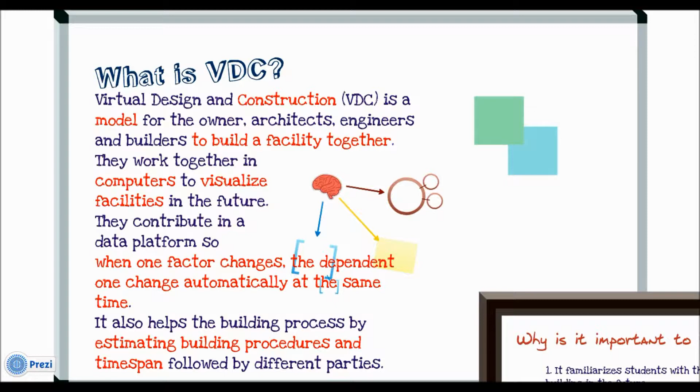Different parties also contribute in a data platform by inputting different data about the construction works. For example, the time required by each construction work, the cost of each factor of construction, different design parameters, etc., so that the building process can be carried out smoothly and efficiently.

One may ask, why is VDC education important to a university? First, it familiarizes students who are going to take part in the real estate and construction industry with the state-of-the-art construction model, which is very likely to be widely used in the future.

The VDC model has been attracting more and more attention from practitioners and scholars worldwide. And with the growing trend of using computer and cloud platforms in the industry, it is better to equip students with the knowledge rather than leaving them barehanded.

Another reason why university needs VDC education is that the model gets students to think holistically. By inputting and presenting different parameters in a computer platform, students can understand what is involved in a construction project and what they have omitted in the planning procedure.

Also, they can learn how to identify and rectify clashes in design and procedural aspects, so that in the future when they are engaging in construction projects, they can have better planning and design.

Of course, the VDC model attracts more and more attention not without reason. The first advantage of VDC at work is that it speeds up the construction process for different parties.

One significant feature of VDC is the use of internet platform and cloud system. This feature allows different parties to take part in the project via internet rather than in traditional face-to-face manner. Also, information can be retrieved easily anywhere at any time by anyone. This advantage is especially significant when the project team consists of members from different places in the world.

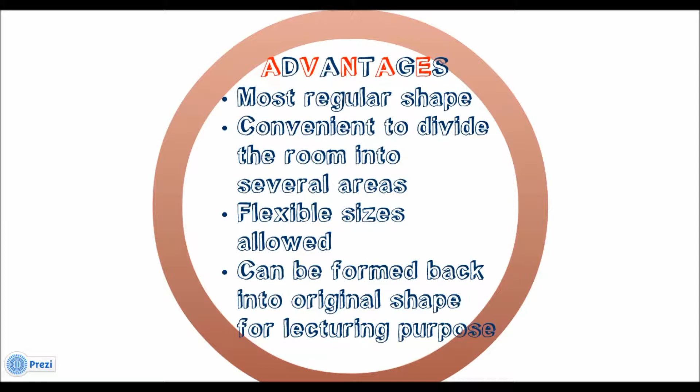KB526 can also be formed back into its original shape for lecturing purposes. The only disadvantage is that we have to change the framework of KB526.

For instance, the position of doors, alignment of walls and floors, because we have to demolish the steps to accommodate electrical wirings. The false ceiling has to be added as well. All these alterations aim at fitting the usage of the iRoom and other corresponding building surfaces.

Refer to the basic designs and infrastructure provided. The room can be divided into 3 compartments. It will be equipped with an iTable, 2 fixed smartboards, 2 movable smartboards. There are sufficient tables and chairs to cater for 70 students, or just 100 chairs for a big lecture.

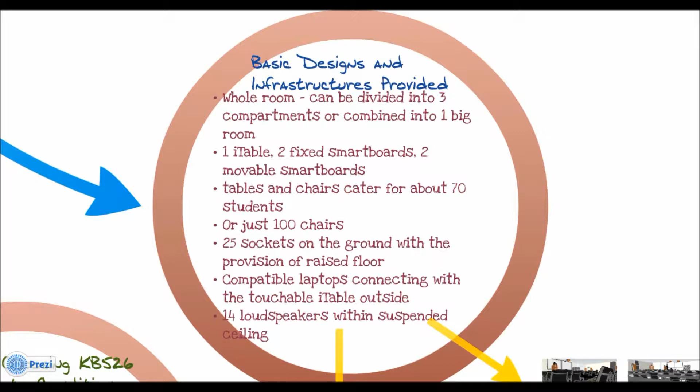25 sockets are hidden on the floor with the provision of raised floor. Both touchable iTable and smartboard can be connected to compatible laptops. There are a total of 14 loudspeakers on the false ceiling.

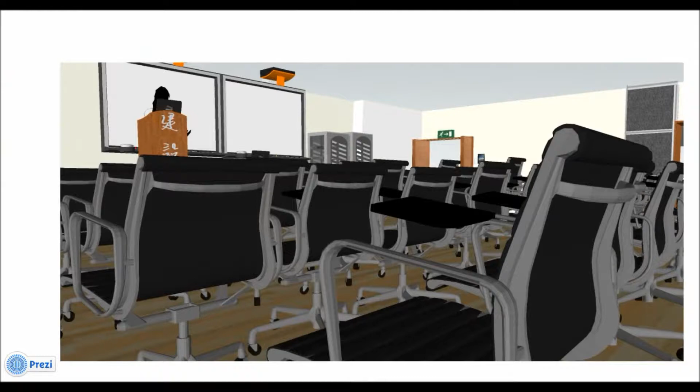Here shows you some photos of the room, the chairs, the tables. You can see that the room is divided into 2 compartments by using partition walls. It can be divided into 3 compartments as well.

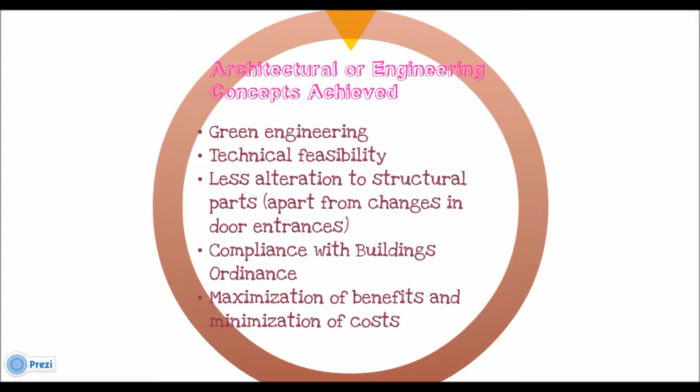In our room project, we try to achieve architectural and engineering concepts. Green engineering concept is achieved as the room is in fact energy saving and sustainable. Technical feasibility is considered. Apart from the change of the position of doors, alteration to structural parts is avoided. In our project, building ordinance is complied with, benefit is maximized, and cost is minimized.

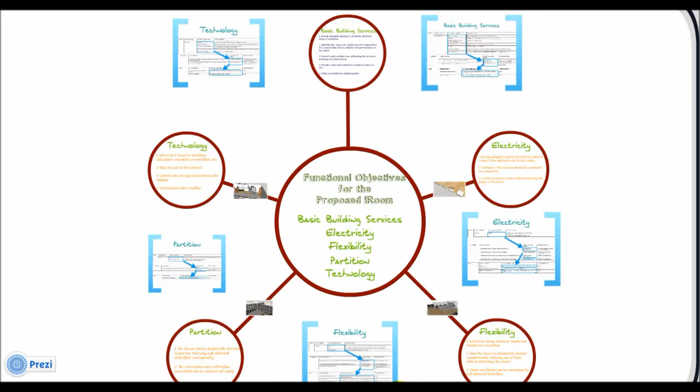Now, let me talk about the functional objectives of the room and how these objectives can be achieved. There are 5 functional objectives, namely building services, electricity, flexibility, partition, and technology. A product organization process model, or in short POP model, is used to explain how the goals can be achieved.

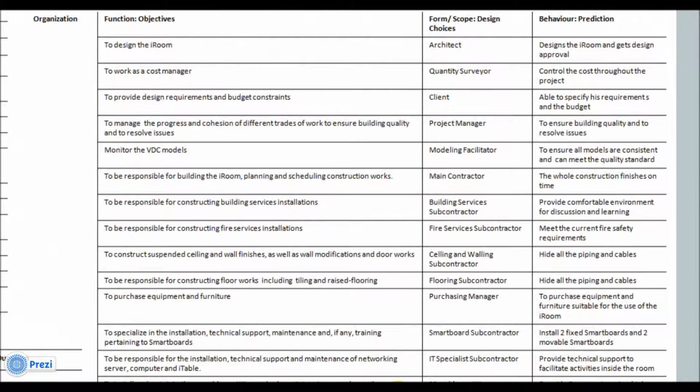Here is the product part, the organization part, the process part.

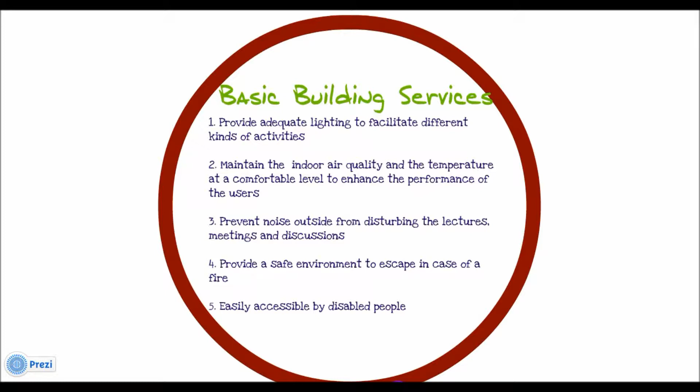In terms of basic building services, adequate lighting will be provided to facilitate different kinds of activities. Indoor air quality and temperature will be maintained at a comfortable level to enhance the performance of the users. Noise outside the room should be prevented from disturbing the lectures, meetings, and discussions. A safe environment is provided for escape in case of a fire, and disabled people can access the room without any obstructions.

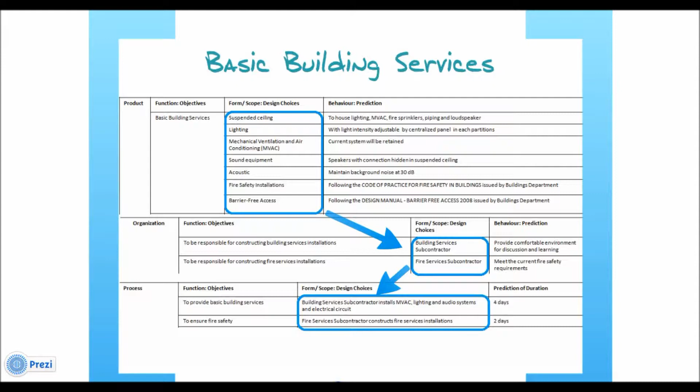Referring to the POP model, a building services subcontractor will be employed to install suspended ceiling, lighting system, MVAC system, sound equipment, acoustic treatment, and barrier-free access facilities, while a fire services subcontractor will be responsible for the fire services installation.

In terms of electricity, adequate electric sockets will be provided for users to connect their laptops to electricity supply. Positions of the sockets should be convenient for connection but hidden so as not to affect the design of the room. Therefore, sockets are hidden in the raised floor.

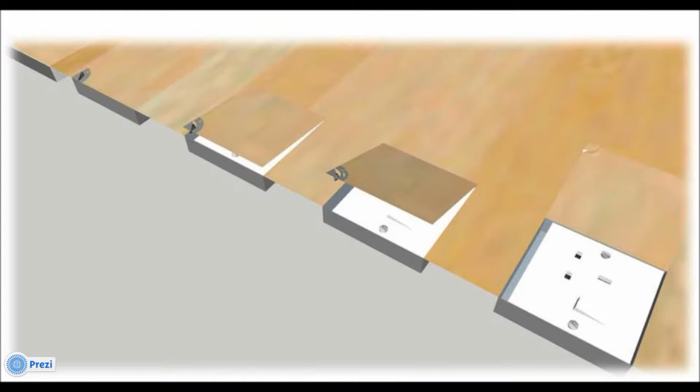Referring to the POP model, a building services subcontractor and a flooring subcontractor are responsible for installing the sockets cooperatively.

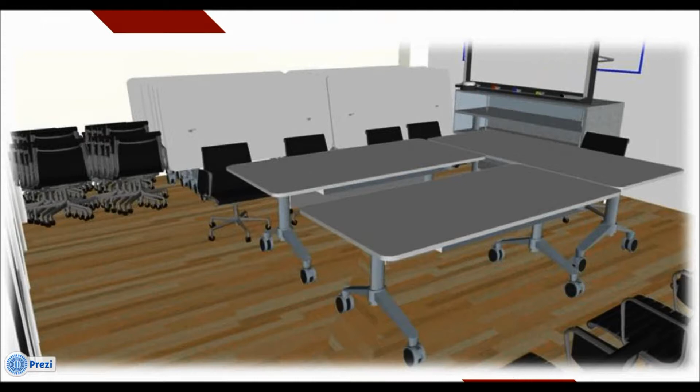In terms of flexibility, electrical wiring should be hidden and flexible for relocation, entering one of the compartments without causing disturbance to users of other compartments. Also, chairs and tables should be movable to facilitate different activities.

Referring to the POP model, a ceiling and walling subcontractor has to modify the door openings. A floor subcontractor has to build the raised floor for accommodating the wirings, and the purchasing manager is responsible for buying movable chairs and tables.

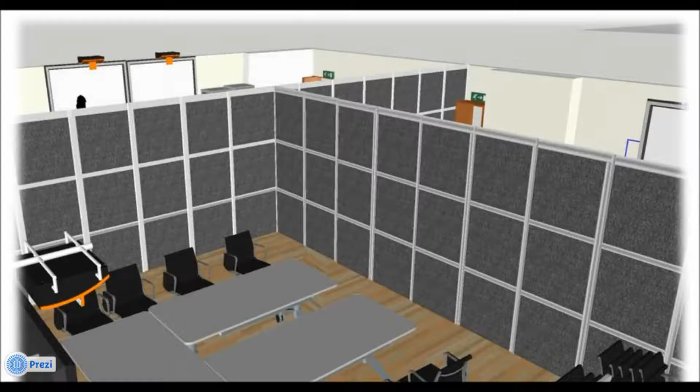In terms of partition, the room should be able to be divided into several compartments for carrying out different activities concurrently, while the conversion and restoration process have to be easily carried out. Therefore, movable internal partitions will be used.

Referring to the POP model, a movable partition subcontractor will be employed to construct movable internal partitions so that the room can be divided into 3 multi-purpose compartments.

In terms of technology, high-tech tools and internet access will be provided. A server capable of central data storage, internal data sharing, and a centralized control system will be installed.

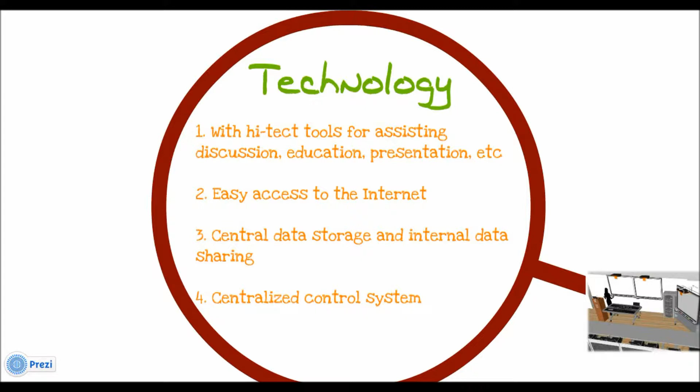Here you can see the iTable and smartboards. Referring to the POP model, a smartboard specialist will be employed to install the smartboards, and an IT specialist subcontractor will be responsible for all other high-tech tools and systems.

Since the 5 functional objectives have already been illustrated using the POP model and parts of the 3D BIM model, I will talk more on how those 5 functional objectives can be achieved using the Gantt chart and organization chart below.

First, I will start with the functional objective of efficient basic building services. What we have to focus on is how this objective can be achieved through careful planning. Planning in terms of time and person in charge is significant to the success of a construction.

For example, we can see that installation of different types of building services may be done by different specialists. However, one party's process of work and final finishing product may affect the other party's work or efficiency, etc. In this case, for instance, the installation of fire services may have some correlations with the installations of MVAC system and lighting system.

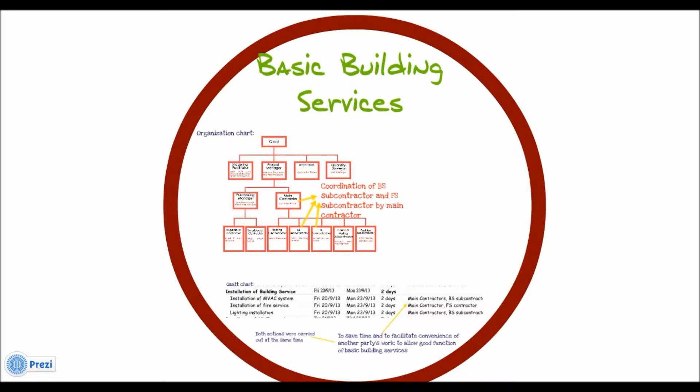In order to facilitate future usage during the occupational period and potential maintenance of the electrical wiring system within the raised floor, we have the following arrangements. The work of the flooring subcontractor will start as soon as the building services subcontractor has fixed all the electrical wires, as indicated in the Gantt chart.

This is to ensure that there will be enough space for future fixing or maintenance. Also, this is to avoid too much dust or various particles from accumulating on the electrical wires, which will in turn affect the performance of the electrical wiring system.

Once again, as shown in the organization chart, both the building services subcontractor and the flooring subcontractor are under the supervision of the main contractor for higher efficiency of work.

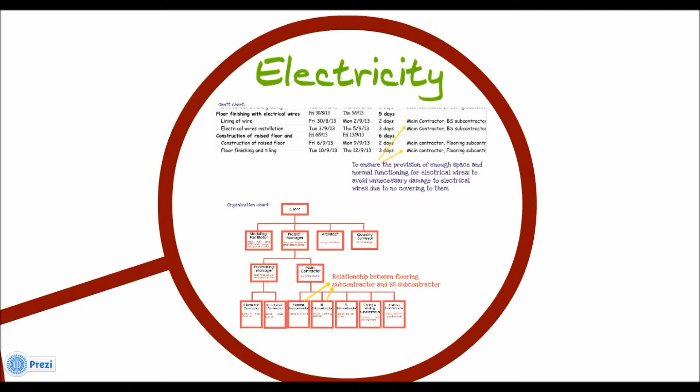Next, talking about the functional objective of maintaining flexibility and providing partitions. Different measures have been planned, some may have already been mentioned in the previous part using the POP model and some parts of the 3D BIM model. These include the installation of tracks for partitions and also the alteration to the walls to make new door entrances.

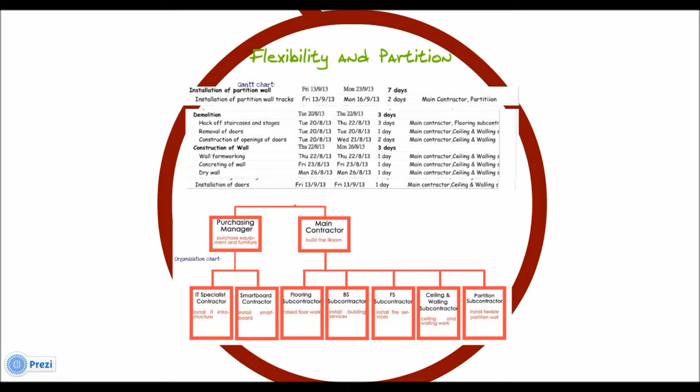However, from the Gantt chart, it is noted that some of these jobs cannot be done in parallel with other jobs due to structural safety issues, like in the case of partition tracks and door entrances.

Lastly, for the functional objective of technology, we have allowed the installation of internet and cloud systems to be done during the same period of time. This is to help facilitate each other's work.

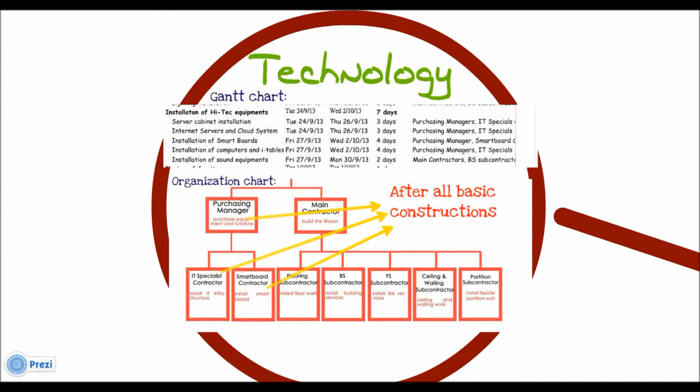The installation of computers and the iTable will also be done in parallel to ensure the coordination of all systems mentioned in the Gantt chart.

Now I'm going to talk about the 5 business purposes of the models. First, VDC strategy can enable companies to achieve significant breakthrough objectives. Some organizations now find significant competitive advantage from their facilities or their timelines of developing new facilities. The project can be completed in drastically less time while preserving or improving quality, schedule, and cost performance.

Second, different stakeholders have different responsibilities. VDC improves the coordination and exchange of information between project stakeholders. This results in effective and quick solutions to bottlenecks that may occur during a project and that could prove to be costly during the construction phase.

Third, stakeholders can collaborate by sharing visualizations. The model strongly emphasizes the use of models that can be described to and evaluated by multiple stakeholders. It ensures the integration, follow-up, and management of all 3D models within a central model.

The 4th dimension links construction planning with the element of time. 4D models allow our customers to visualize and optimize project phasing and construction sequencing.

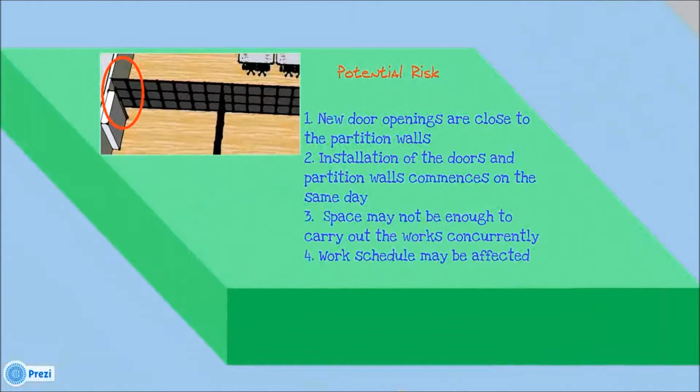There are some potential risks in the project. For example, since new door openings are close to partition walls, and the installation of doors and partition walls commences on the same day, space may not be enough to carry out the works concurrently and the work schedule may be affected.

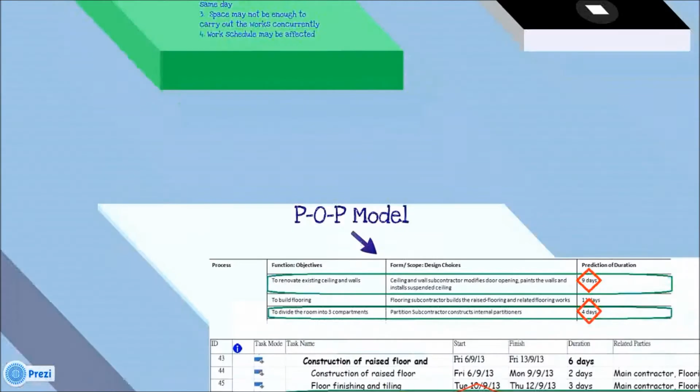From the process chart of the POP model and the Gantt chart, we find the information of relevant works. For example, from the POP model, renovation of the existing ceiling and wall takes 9 days, and construction of the internal partition takes 4 days. From the Gantt chart, we can see that the installation of doors and partition wall tracks start on the same day.

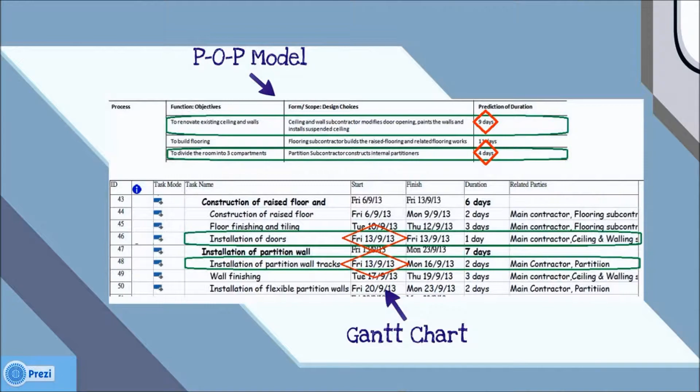Both contractors and client have to take some risk on this task. The wall and ceiling subcontractor and the partition wall subcontractor may fail to finish their work on time, which affects other trades. Then they have to pay damages to the client. On the other hand, the client has the risk that the overall schedule may be affected and the construction may fail to complete on time. Then iRoom services cannot be provided at the beginning of the semester.

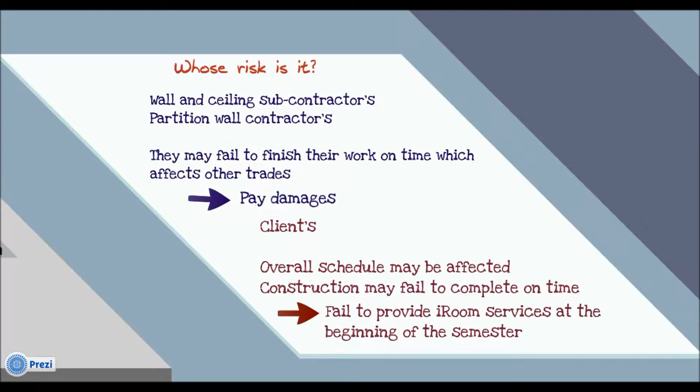From the organization chart, the main contractor is on top of the related subcontractors. Therefore, the main contractor has to provide coordination and instruction to subcontractors so as to avoid them carrying out the work at the same area.

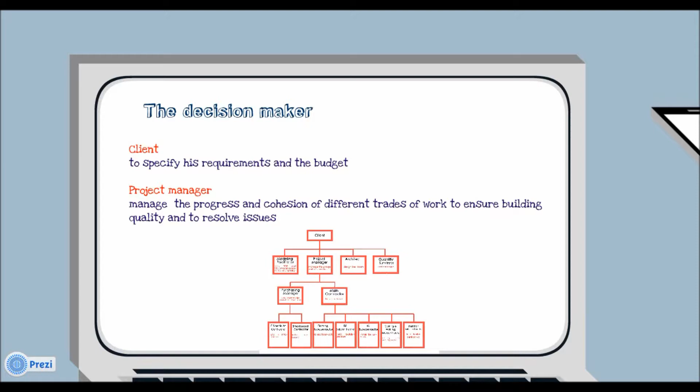The decision makers of the project include the client and the project manager. The client is responsible to specify his requirements and the budget. The project manager is responsible to manage the progress and cohesion of different trades of work to ensure building quality and to resolve issues. From the organization chart, the two parties are on top of the contractual arrangement.

So why do we have to do the modeling and analysis to present to the client? Through these models, our clients can know in detail the possible and proposed quality that can be achieved in terms of technology, durability, and convenience. Also, our clients would like to know the whole life cost, including the future predicted repairing cost. Schedule and risk are important too, since this will affect the smoothness of the construction process.

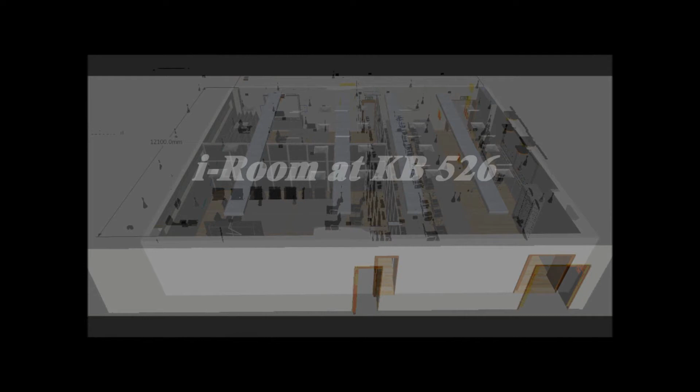After we have discussed the concept model behind this project, let's see our 3D building information model and understand how we realize or measure the function. In this model, false ceiling and building surface on the roof is hidden for the ease of observation.

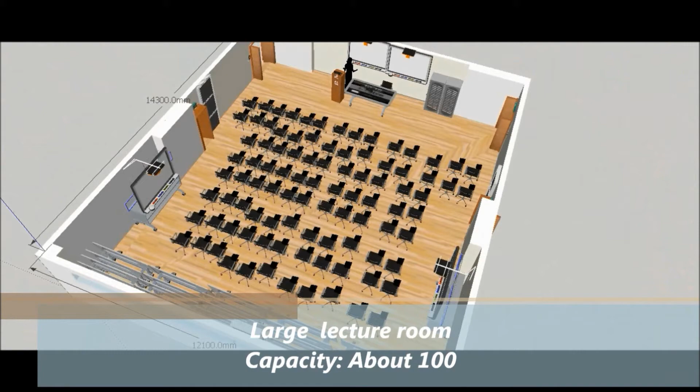In this layout, all the tables are folded, put at the back of the iRoom. It can cater for about 100 audience. This layout is suitable for common core classes or guest open seminar.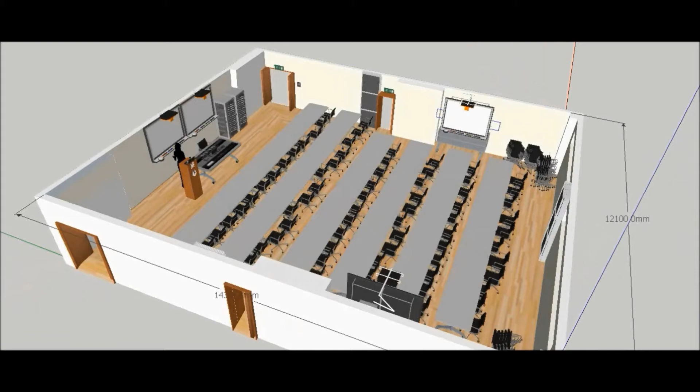In the second layout, it is a lecture room with table and chair. It can facilitate students' learning by providing more table space. It is crucial as our department needs to teach VDC in future. Students need to use their computer, mouse and notes at the same time to learn.

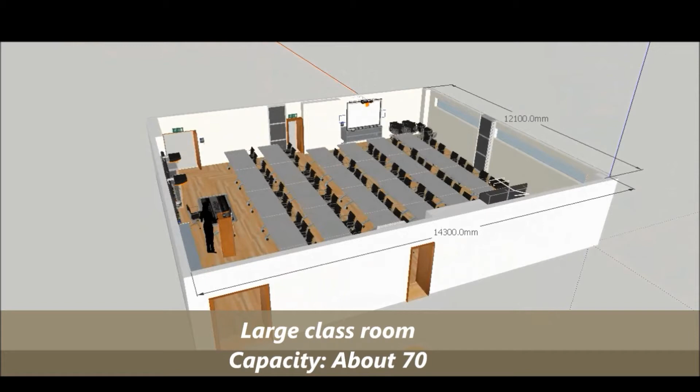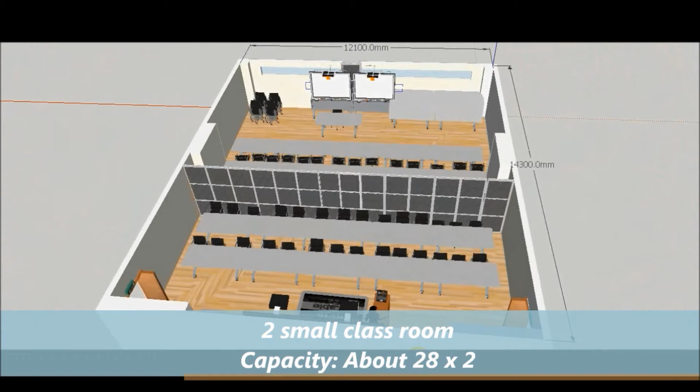Our iRoom can be divided into two smaller classrooms by movable wall panel. Each side can cater 28 students. It can be used for tutorial classes. This layout can facilitate two classes at the same time.

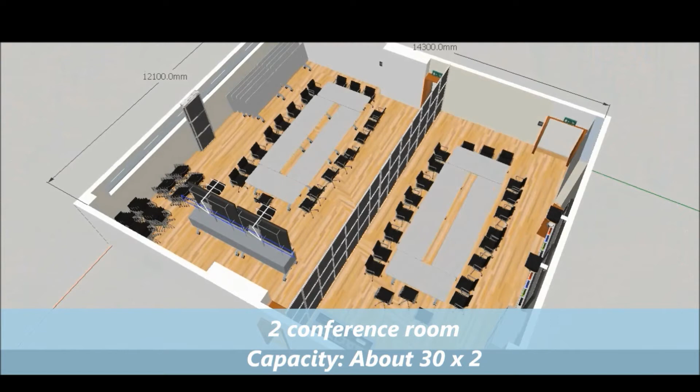The table and chair can be rearranged flexibly. The iRoom can become two conference rooms. It can provide more conference room for the department. It can also be used for tutorial classes, which is general discussion in nature, for example tutorial in first year or 4th year curriculum.

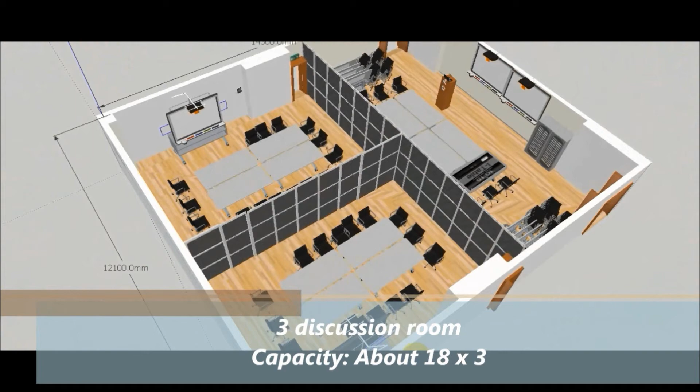In this layout, the iRoom can provide 3 discussion rooms. These rooms are larger than other discussion rooms on the 5th floor. It is suitable for serving studio meetings, which can cater to 2 groups at each room.

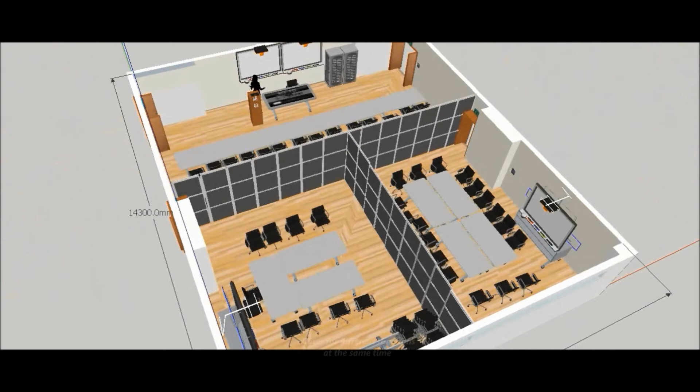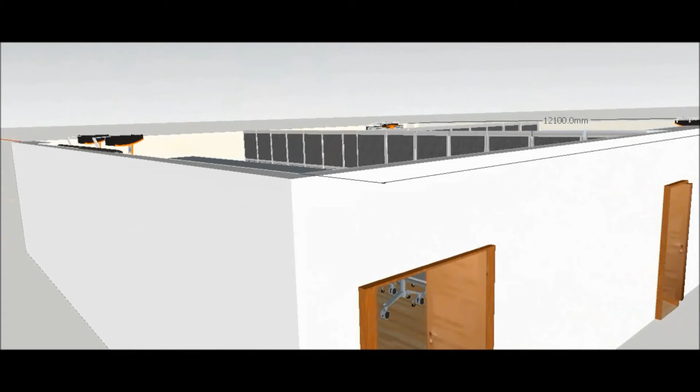In fact, all the layouts shown before are just basic examples. We can flexibly arrange all the movable tables, chairs, and walls to facilitate different functions at the same time. Just be creative, and our iRoom can suit different needs in future. Let's create infinite possibility in the iRoom at KB 5 to 6.

In this project, I was introduced to 3D modeling. At the beginning, I wasn't sure whether I could handle it or not because I thought it was quite complicated. However, after 3 weeks' time, I learned its basic components and how it can be used to enhance the quality of a construction project.

I think it is worth spending time learning the software of VDC modeling, such as Google SketchUp, Microsoft Project Professional, and other more advanced software, because this can enhance my competitiveness. Although it is not common to use VDC modeling in Hong Kong now, I think it will become more popular soon, because applying VDC modeling properly can help save cost and time of a construction project, which can make the project more cost-effective and profitable.

To conclude, I would like to thank all my groupmates for their contribution and hard work, which made this mission possible. It was a memorable experience to work with them in the library for the whole day.

This is the first time that I learned about virtual design and construction. It gives me new insight on how to organize a group of project teams in a construction project using computer technology. It is also my first time to come across the iRoom.